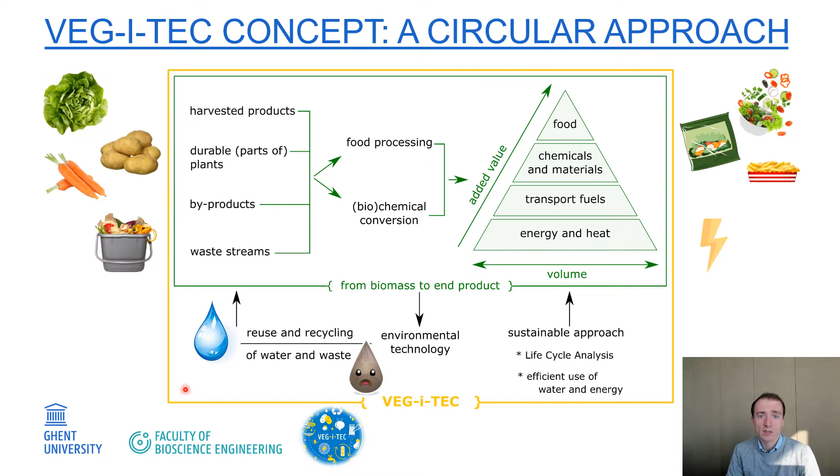Research of innovative solutions is mostly performed on lab scale, fully standardized. At our research group, we noticed that this transition from research towards industry is often too complicated and therefore not implemented.

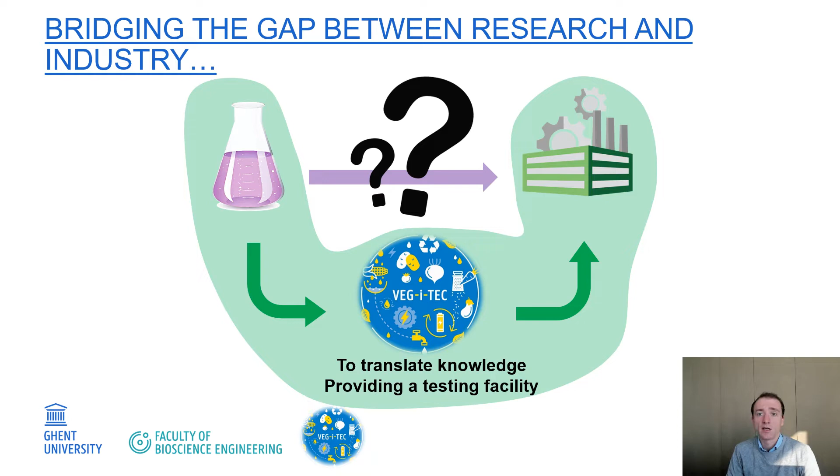With VEG-i-TEC, we want to provide the translation of this knowledge towards the industry by, amongst others, providing a well-equipped testing facility, a so-called miniature factory simulating industrial processing activities.

VEG-i-TEC wants to stimulate innovative applications and developments in the food processing sector. This, first of all, to have a faster transition from the innovation phase towards actual implementation. This is now often an issue.

This philosophy we apply during the investigation of new solutions and innovations, but also during demonstrations or validations of existing technologies. As a university, we also want to inform not only the industry, but all actors on solutions, but also on existing issues and problems.

This by bringing together industry with academia and the government in a quintuple helix approach in which the impact or relation with civil society and especially the environment is close by.

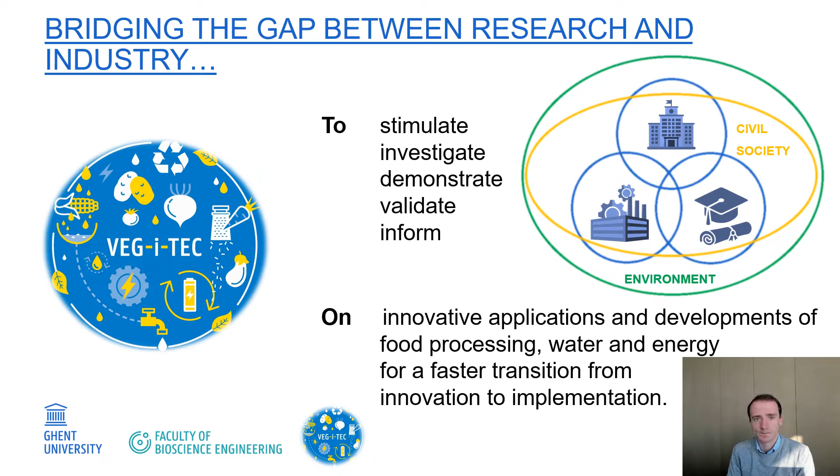One could say that VEG-i-TEC is presenting itself on the edge of innovation and implementation. The focus is on new technologies, not only how we can develop them, but also how to implement them in a practical way, and on improving the old.

In a large sense, VEG-i-TEC has four main pillars. First of all, an optimal product quality and safety, or improved quality and safety. Secondly, the hygienic design of machines has a high impact on the process, resulting in a faster and/or better cleaning and disinfection process.

This not only improves product safety, but also reduces downtime and needed manpower. Additionally, the reduction of waste generation and an efficient water and energy management is unavoidable.

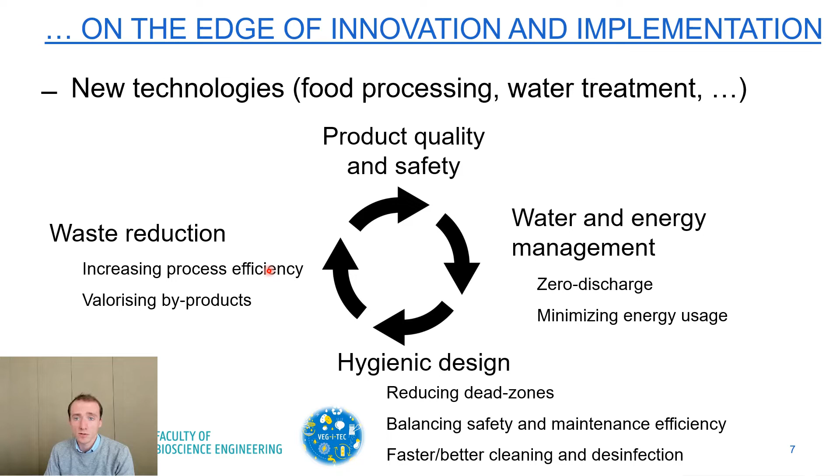At the very last, waste can also be reduced by more efficient processes. For example, also completed by side streams and byproducts that can be valorized into products with added value.

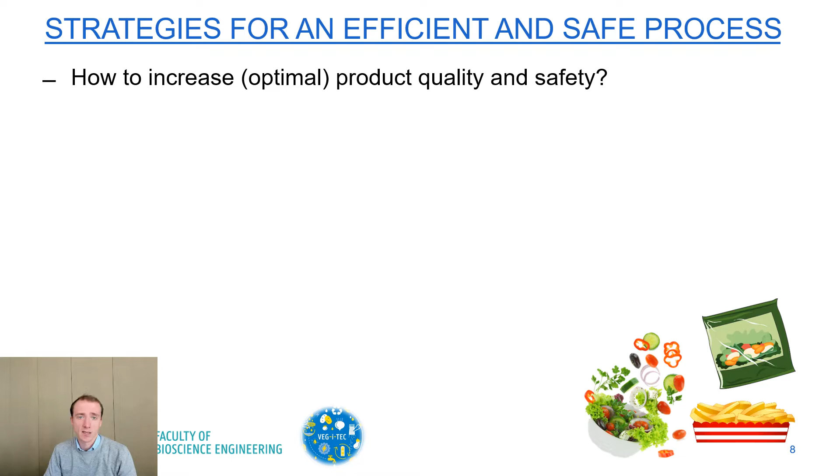But first of all, how does VEG-i-TEC help to increase product quality and safety? By testing and implementing innovative technologies in a full pilot process line, for example, and by setting up such a pilot facility to compare conventional versus innovative technologies.

One example I can think of here is a packaging machine we are developing currently together with a machine builder, in which we will optimize and build an aseptic area built within the machine itself.

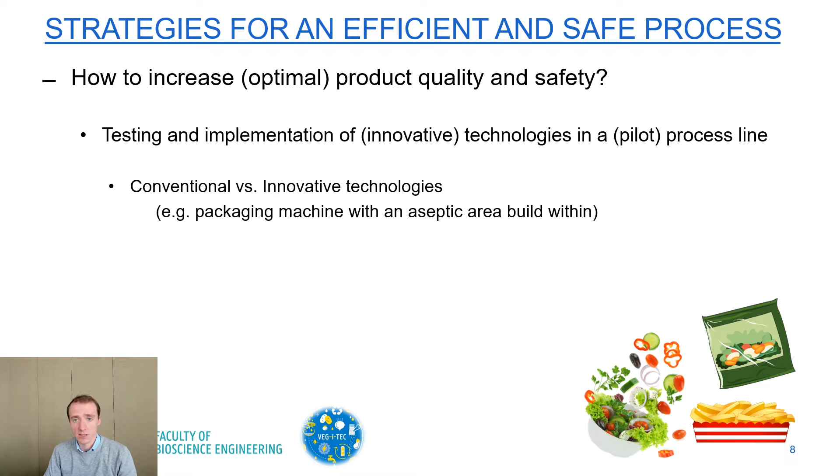Another nice example is where we use vegetable waste to extract natural antimicrobial agents. These agents can then be applied in novel coatings to extend the shelf life of processed products.

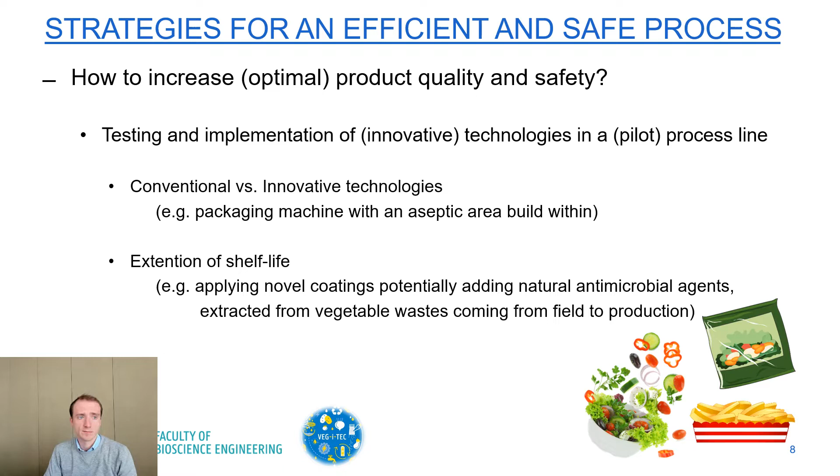Another topic is the evaluation and optimization of the hygienic design of equipment. For example, the formation of biofilm with, for example, Listeria monocytogenes is a big issue in the food industry. Research is currently performed to investigate how we can prevent the formation of this biofilm, but also we look into how the biofilm is formed.

Next to that, we are also looking to better, faster, and less chemical and water consuming cleaning and disinfection processes. Also here, an optimal hygienic design of the equipment can be beneficial.

During processing, contamination and cross-contamination of the product needs to be avoided. Methods are being developed and evaluated to prevent this, for example by disinfecting the washing water and having a look at which chemicals are suited best for this.

Otherwise, we can also look towards potential chemical-free methods to have the same water quality. But also, of course, in the end, we need a safe product.

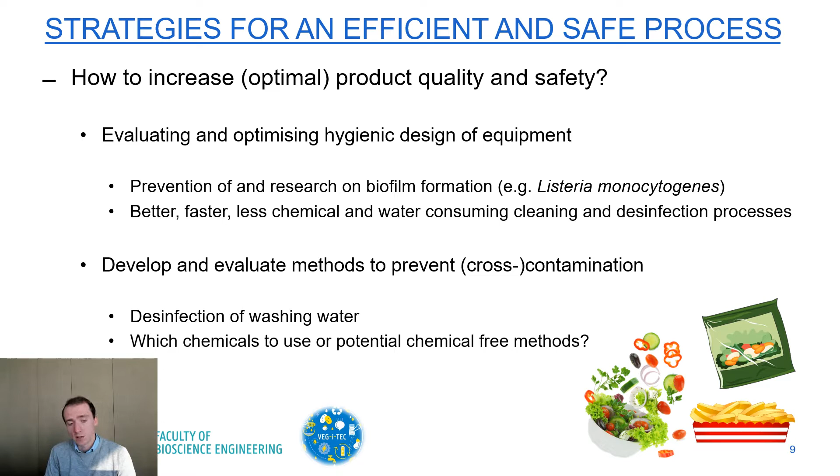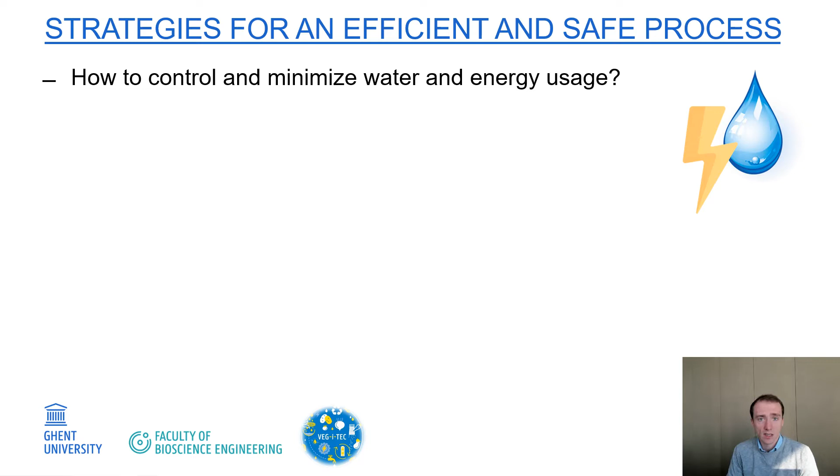How to control and minimize the water and energy usage is also a big question within the industry. Due to the limitation of the use of tap water or even deep groundwater, the food industry is forced to look towards existing or innovative water treatment technologies, both inline or as a reconditioning step, for the maximal use and reuse of water, or second of all, to look for alternative water sources, maybe after treatment thereof.

At the end of the production day, VEG-i-TEC also looks for solutions and methods to have a minimal environmental impact and, of course, an ecotoxicologically safe discharge.

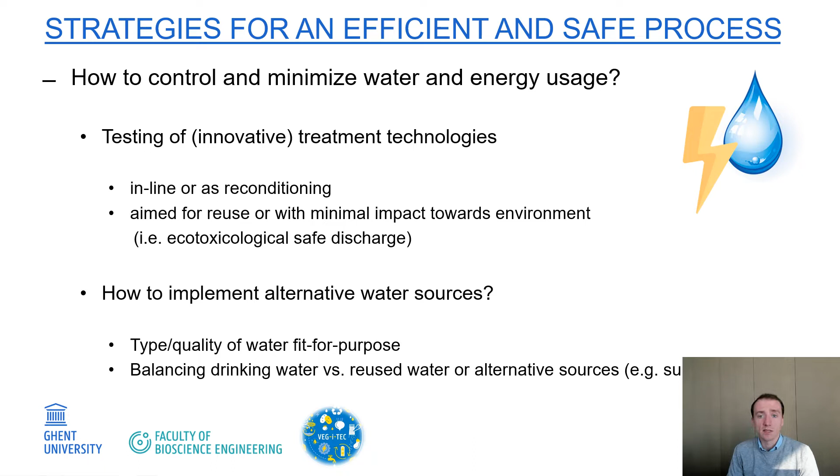Of course, we also think about how we can balance these solutions with the imposed legislation. Therefore, VEG-i-TEC is also in direct contact with legislative bodies to go into discussion and to balance the potential of technologies with legislation, for example by reusing treated process or wastewater.

Companies often have no clear idea how process parameters are influencing their water and energy use. There is still a clear data gap to achieve efficient monitoring and control of their process. Within VEG-i-TEC, research is going on to define the best process parameters, how we can measure these parameters correctly, which equipment and sensors we need to use, and which methods or platforms are available to visualize and manage the data.

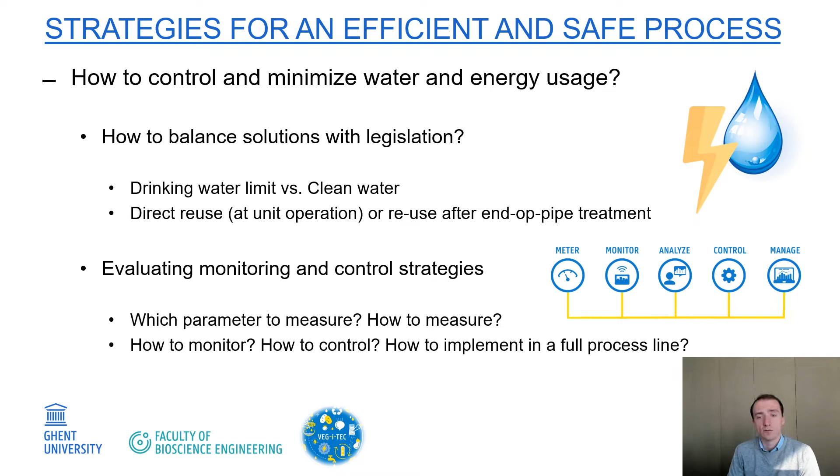For the valorization of generated food waste, VEG-i-TEC also applies a clear strategy. Extraction technologies are applied towards the side streams we are having. These can be chemical, biochemical, physical, or a combination of these methods applied to the side streams.

With the analytical techniques in our lab, potential interesting components can be extracted. These components can be macronutrients, for example proteins, or even microcomponents such as phenolics. At the end, we are always looking to have an application in food and feed. One of the questions we are trying to answer is if we can possibly increase the nutritional value of other products by applying these biomolecules.

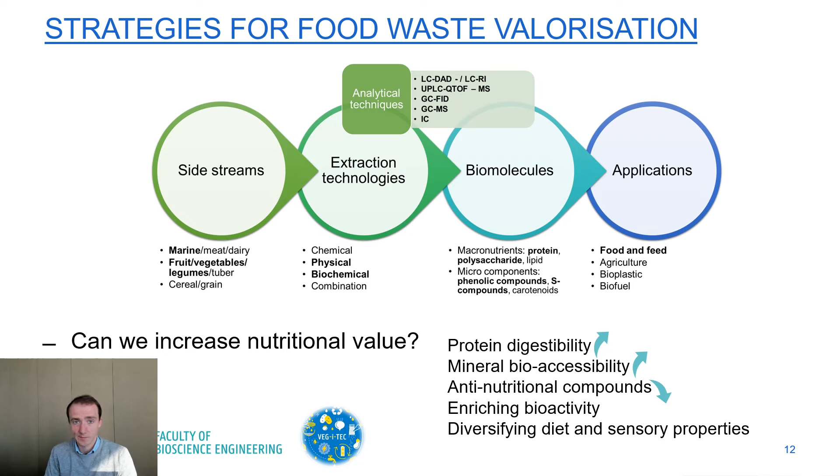Different side streams are, for example, generated in the vegetable and potato processing industries. For example, potato peels, rich in components like proteins and starch. But also wastewater is generated, such as blanching water, which is rich in starch and can potentially be extracted and purified from the water, enabling the reuse of this processed water.

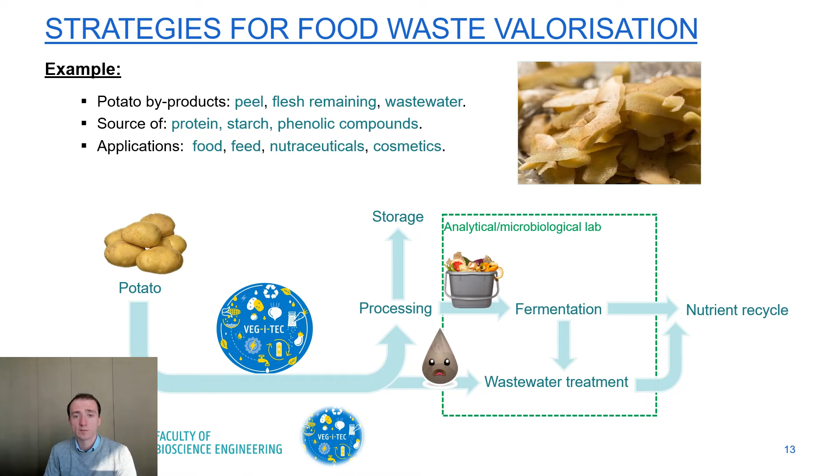In both cases, for the peels as well as the blanching water, the extracted components are aimed to be valorized in new applications in food and feed, but also as potential use in nutraceuticals and cosmetics.

Then I want to answer the question: who and how can we help? VEG-i-TEC is open to almost everyone, but more specifically we are there for machine builders, technology suppliers of different kinds like water technology and sensor technology, and also for the vegetable and potato processing industry. At last, national and international research organizations and institutions are those we are really cooperating with.

I also want to say VEG-i-TEC is not only a Ghent University story. We are in close cooperation with other organizations and institutions, which are all specialists in specific topics, for example related to energy management, but also specific topics in water and food.

VEG-i-TEC is also not just a place for research. It also provides lots of services, training courses, workshops, and demonstrations. We can offer this ourselves, but we can also take up a more participating or even facilitating role, depending on the required needs of the customer or research partner.

The unique benefit of VEG-i-TEC is the availability of pilot-scale infrastructure in both an industrial and an academic context. This also ensures that cooperations can result in different project formats, going from a collective kind of project on one side towards theses, internships, student projects, or one-on-one projects on the other side.

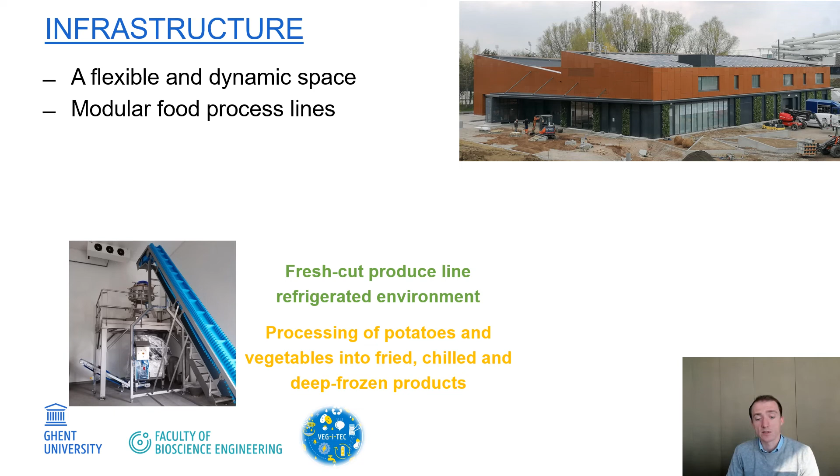Within a refrigerated environment, we also will have a second line. This second line will be constructed, focusing more on the processing of potatoes and vegetables into fried, chilled, and deep frozen products.

Additionally, fermenters will be available within the VEG-i-TEC building for the valorization of side streams of the food processing lines. These are also available to use on waste streams coming from food processors within the companies themselves.

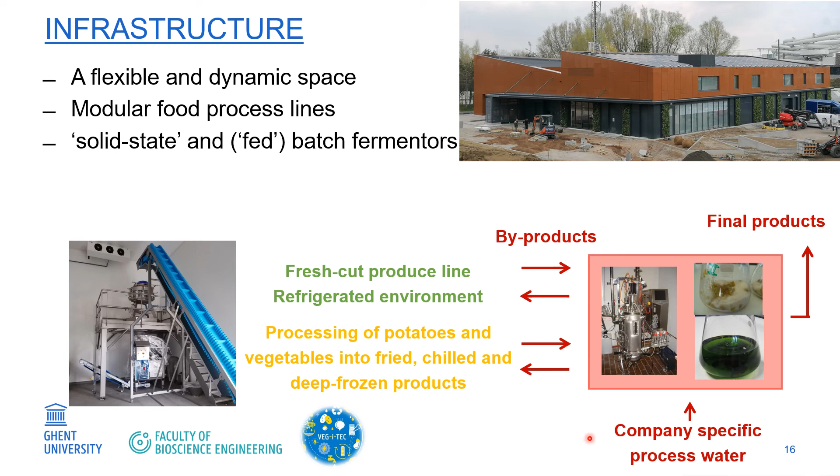Next to the food processing pilot hall, a well-equipped pilot hall for water treatment purposes is available with different multifunctional pilot zones. Different water tanks are also available in the building to collect industrial wastewater, for example from a specific company, but on-site process water and alternative water sources such as surface water and rainwater are also available, which can be treated or sent to the process lines for reuse or use.

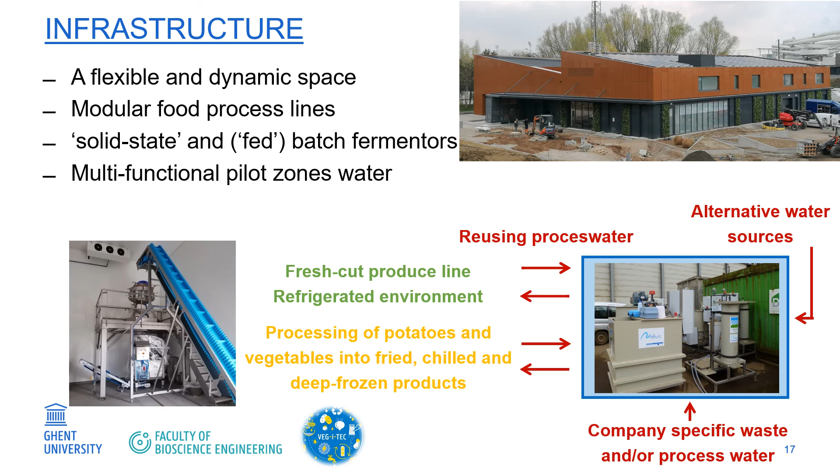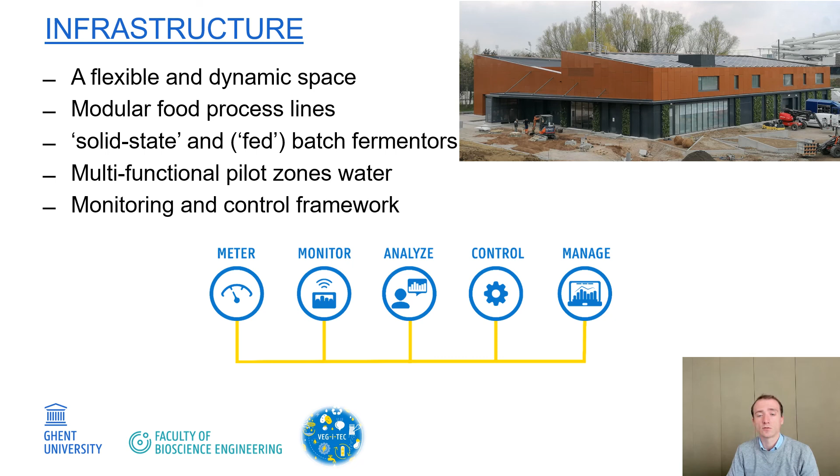Additionally, a complete monitoring and control framework will be constructed to measure and monitor energy and water streams within the VEG-i-TEC building. The system will be constructed as a demonstrative example towards the industry. The implemented system is further foreseen to communicate with the platform, to analyze and manage the data on one side, and secondly to use this to control the processes within the building.

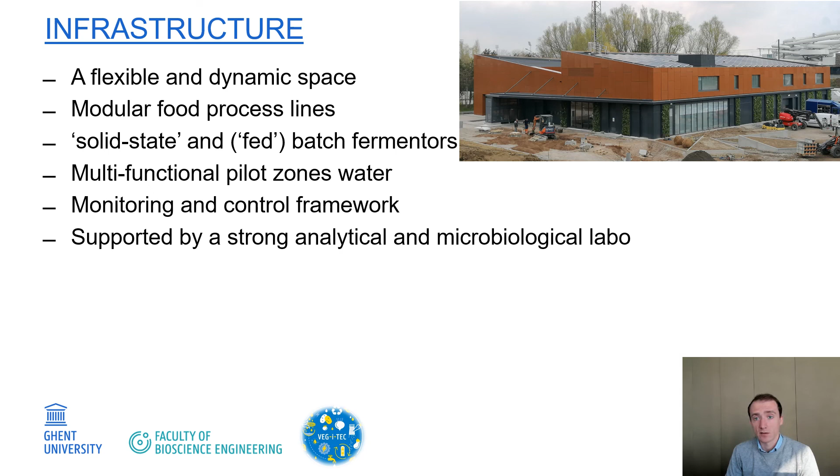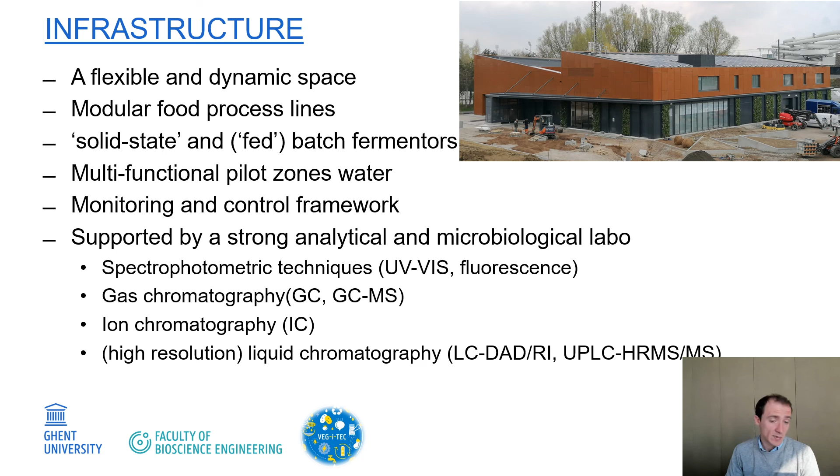Everything we will be doing or are doing is supported by a strong analytical and microbiological lab, in which we have year-long expertise, but also availability and accessibility of a large number of measurement techniques, such as spectrophotometric techniques, but also going towards high resolution chromatography.